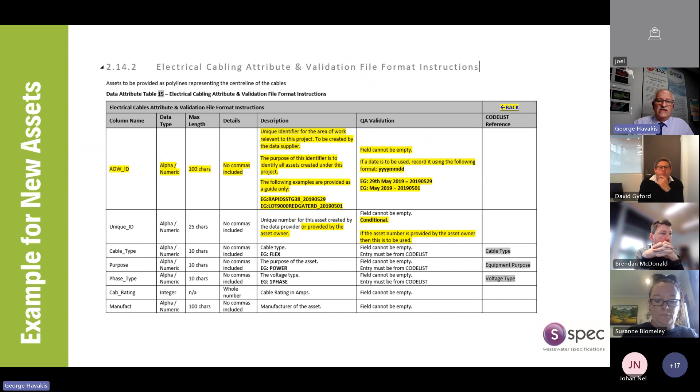When you look at the existing version, you'll find an additional column. The purpose for that is we've looked at what is practically possible to capture when you go out in the field. There are three categories we've classified each attribute under: is it a core requirement, is it an optional requirement, or is it a desired requirement, which is YR, meaning more research is required. It may be that the research identifies there's no further information, in which case that's the answer - no further information. If there are default fields, you use the default fields.

Both of these versions are available through your login, available online. If you have an A-SPEC website login, you just use that to access these documents. If you don't, please let us know - I'll show you how in the wrap-up session. Essentially, fill in the contact form on the A-SPEC website requesting access, and Melissa from our office will address that for you.

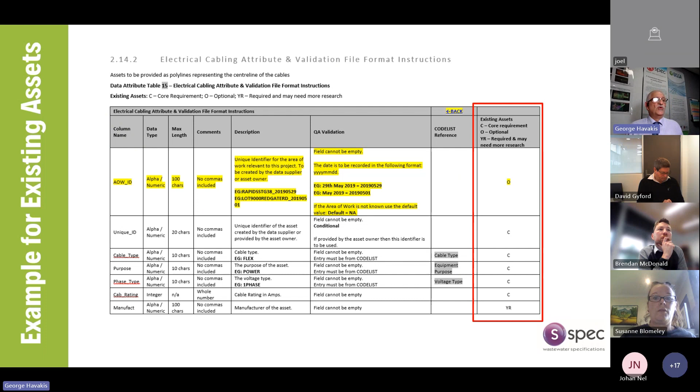To get to this point, there's a whole lot of other work we've been doing. Really what we're doing is future-proofing the specs, and a lot of that comes from looking at other initiatives, national and international, which I'll talk about today, and looking at input from the users. A few examples today come from authorities utilising the specs or consultants. Brendan, you might be familiar with a couple of examples I'm showing, because thanks to yourself at Wannon Water, it's given us some food for thought about how we deal with these assets.

There is sample data we're preparing to make sure people get a head start with setting up their environments. The sample data will come out as shapefiles, and in the shapefiles it'll have the new structure.

As I mentioned, 4th of September is the go-live date for all the new versions. So the impact is that any projects or new subdivision developments requesting permits on or after the 4th of September will require the data to come back in the new version, the 2023 version.

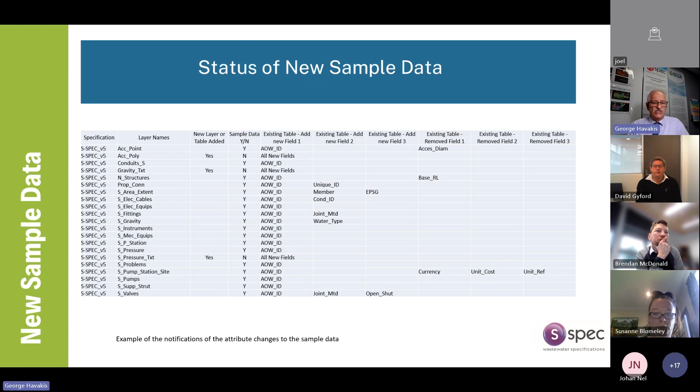There's a lot of work being done in this space with Australian Standard 5488. Some organisations use it to put a level of certainty about the quality of the data in their systems. There are 4 quality levels, which I'm happy to go into during the wrap-up session if people have a request for that, so put that in the chat. Both Gabby and I have been on the technical committees for Standards Australia reviewing AS5488 to make sure it makes sense from a spatial perspective.

From a visualization perspective, the image on screen is something you may be familiar with - when walking down the street you see markups on the ground. These are a requirement for any road opening in Australia. Locators need to locate the underground services, go through a dial-before-you-dig scenario, and mark it up on the ground. On the left is the guide to the markings. It's not intended for a GIS environment, it's intended for markups on the road, so people know that anything blue relates to water, yellow relates to gas, and so on. This gives the people doing the road opening an opportunity to make sure they don't break into existing infrastructure.

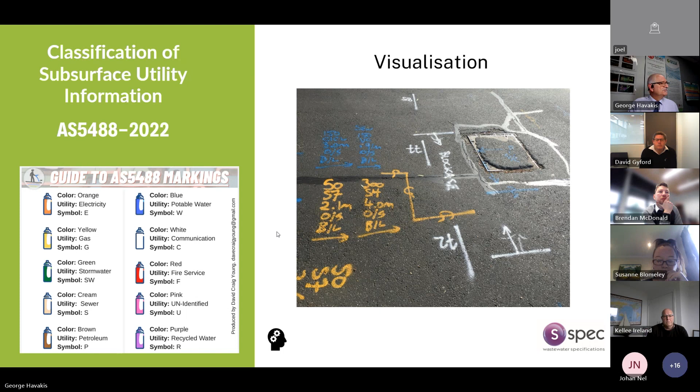From an A-Spec perspective, we've also matched it to see what the alignment is. From an asset class level, on the left, utility asset type, asset subtype and the description come from the standard itself. On the right-hand side we've identified which specification it relates to, what the asset class is, and any notes to take into account. We've done this at the asset class level, and also at the attribute level.

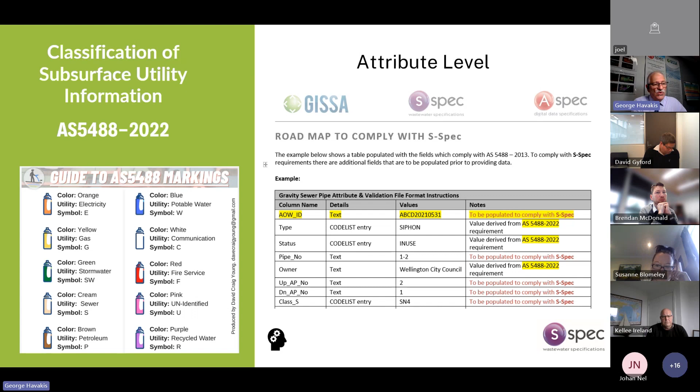The bottom line is we want to end up with this kind of data. What I'm showing on screen is a set of sample data we've been distributing for the 2019 version of S-Spec, and we need to transition from an AS5488 environment to this kind of environment. We want to be updating the asset data at every opportunity we get, irrespective of the kind of activity that happens out in the field.

Michael, can you please pop up the next poll to see if people have been asked to use AS5488?

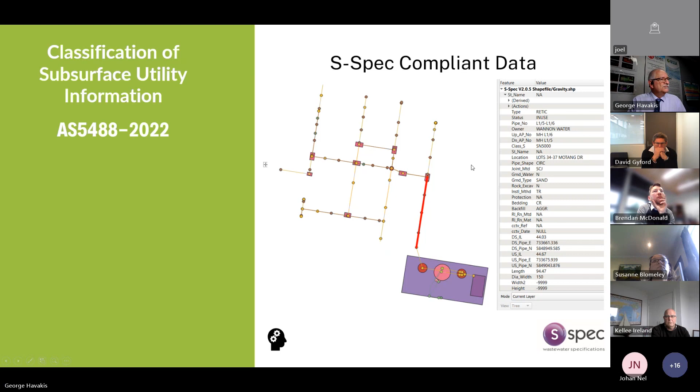There's another initiative that Water Services Association of Australia is undertaking, through an MOU with BIM for Water in the UK, for the management of asset data using UniClass. UniClass is quite topical at the moment because for Victoria, it's also part of the Victorian Digital Asset Strategy. This WICHS initiative addresses the water industry classification, hierarchy, and standardization group. This group is a task group which is part of BIM for Water, which forms part of the UK BIM Alliance.

There's quite a bit of work done around standardizing the hierarchy. We've had a look at it to see how A-SPEC fits into it, and it's a really good initiative because it provides guidance about standardizing your hierarchy. We've been doing quite a bit of work of late with addressing frameworks for creating asset hierarchies and then establishing hierarchies from those frameworks. What we've seen is that this particular initiative is not well used that I'm aware of. If you have a different experience, don't hesitate to put it into the chat or to contact us.

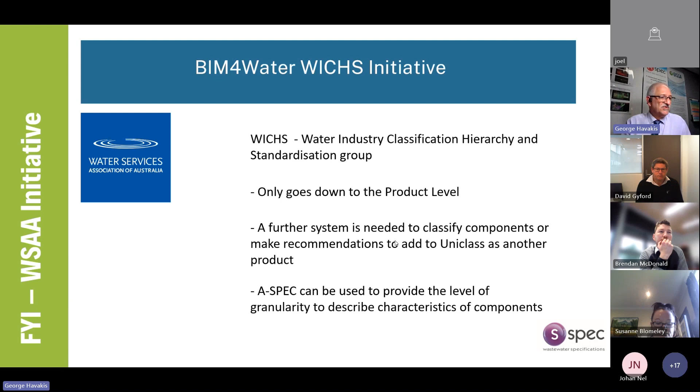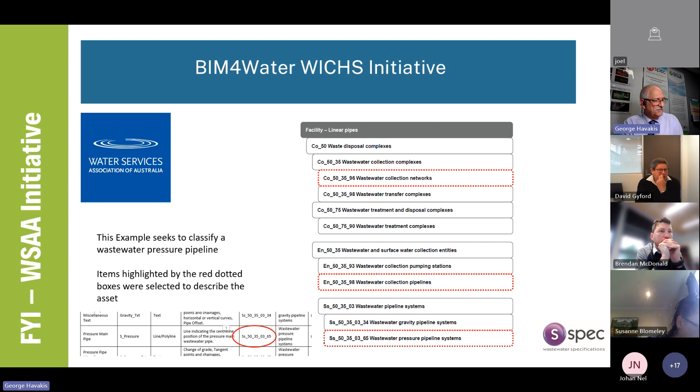It sometimes describes the material. So what we've done is we've looked at it from the A-SPEC perspective, and we've also looked at VBIS, which is another information system that's been developed specifically for Victoria, but looking to be more national. So on the left, we have A-SPEC, we then look at Uniclass, the coding in there, and then we've looked at the VBIS examples. You can see some of them, there's quite a bit of detail there where it refers to table 1, for example, in VBIS. Other times there's no VBIS code. So you can see that there's a level of granularity offered by A-SPEC which isn't offered at times by either of these systems.

The other thing is that VBIS does not have a geospatial component. So it's fine for a classification system, but there's no geospatial component. Uniclass is a little bit like that as well - it doesn't specify point, line, or polygon. It just specifies here's what we're capturing and here's how we code a pressure pipeline system, as I showed you on the previous table.

As you can see here, the codes come down to, for example, if we look at pipes and fittings - carbon steel, and there's some features under carbon steel, or copper, and there's some features under copper. So what we've identified is that these classification systems were essentially designed from an engineering perspective and targeted for the commercial software providers and the consultants to make sure that everything was classified and they would have the same kind of classification.

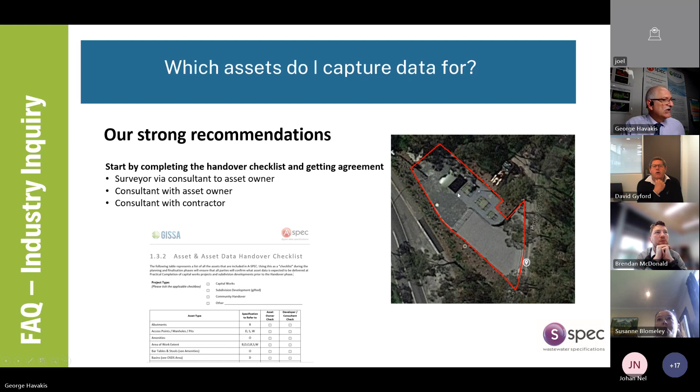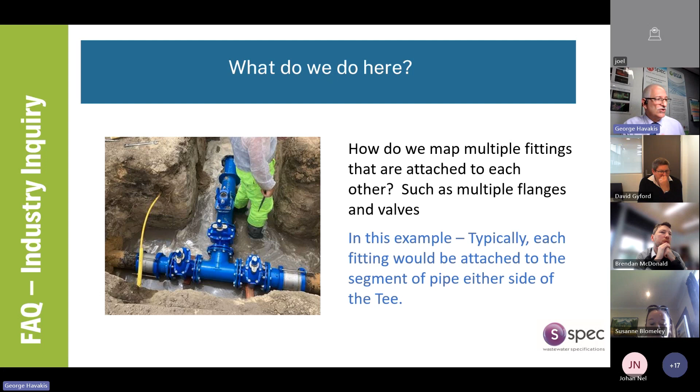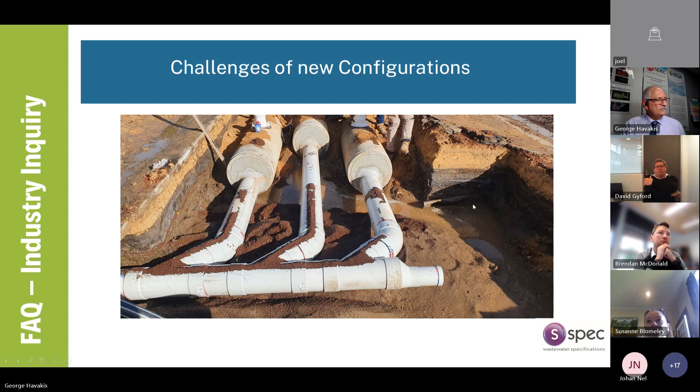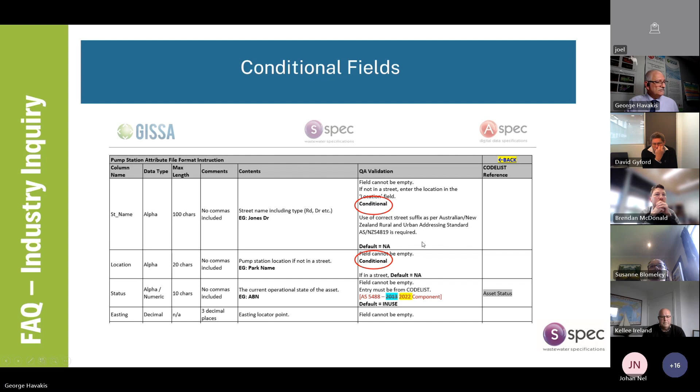I've shown this in the other specs, and this is so we're starting to create a data model to show the relationships. So we're going to be building an entity attribute relationship data model. What that means is that this one is table to table, but we're also going to be identifying how different attributes are linked between tables. Now, we're doing it for our own benefit to try to visually explain how the specifications are and what the relationships are.

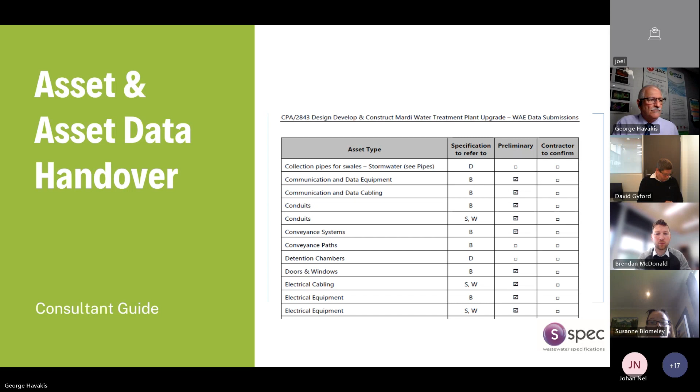The other aspect of quality assurance, and I haven't raised this before, but I thought it was important to outline this.

There is an A-SPEC overview document. In the A-SPEC overview document, we talk about a lot of things, and it's a companion document to all the specifications. One of the sections around acceptance testing is the amount of time for an organization to respond to a consultant. This was done deliberately so that the consultants knew that there was time being spent and deadlines applied to the submissions provided.

If you're not familiar with this, please become familiar with it. To date, the onus is on both parties to make sure that the data conforms to the A-SPEC requirements, but also that there is ample communication if the asset owner is not going to be able to meet these particular timelines.

So we have a catch-all phrase: the A-SPEC consortium members will carry out acceptance testing within the following guidelines, or from time to time as otherwise arranged with the consultant.

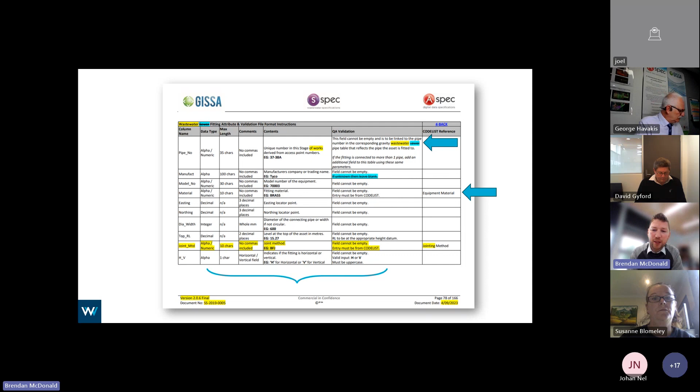Okay, so we've got standardized onboarding, that's the same across both authorities, which requires registration to the A-SPEC online webpage. You sign up once, get the access, sign your little waiver that it's IP and you agree to that one-time thing, and then you can use it for as many projects as you want. You then go on the mailing list and you're getting updates as things change, so access to the standards online means you remain current.

One-off registration to the ACDC portal then allows you to validate your submissions. We provide the induction to the ACDC portal.

That was a big push at the start of the project when it was implemented, but we do have new consultants coming along and not knowing what A-SPEC is or what the requirements are for the ACDC portal. So we're happy to provide any training to newcomers on this method.

As well as an induction to the ACDC portal, where to find the DWG drawing templates, what they mean, how the layers work, training, frequently asked questions, and tips and tricks with using CAD and those drawing templates. There's also the AutoCAD menu bars provided as well, just to help facilitate drafting a bit quicker.

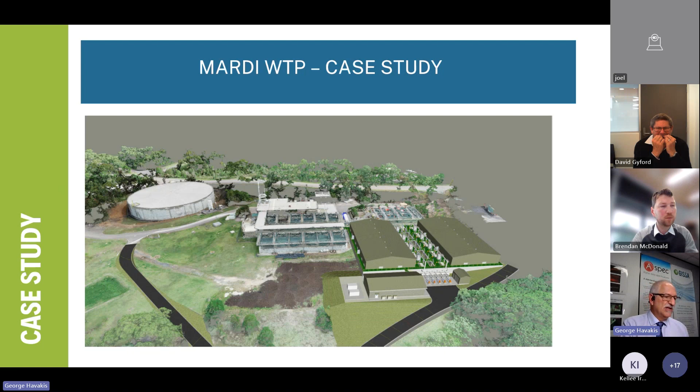It was really important because we'd been talking to them about S-Spec and W-Spec and the benefits of that. So they said, okay, we want to apply A-SPEC to this. How do we do it?

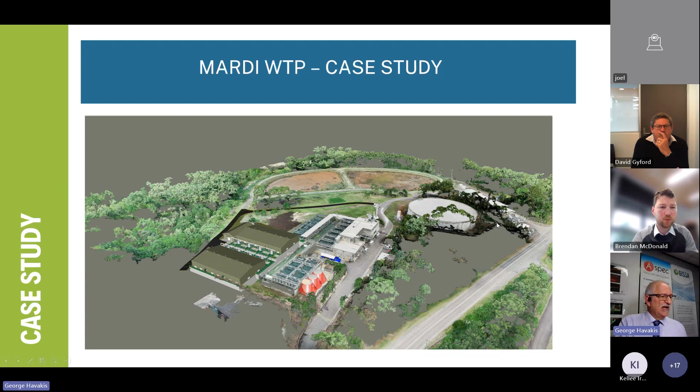So we started off by having a look at the drawings that were sent. These last two images that I've shown are really great because it shows some virtual reality imagery overlaid by the new design. I really appreciated having a look at that. And so we got into finding out what needed to be captured.

At the time we had a team of 4 interns working with us. I was taking them through how to apply the recording of assets to their discipline. 3 of the interns had completed masters in civil engineering, and the 4th had an undergrad in civil engineering and was completing a master's in business and communication. For them, it was really about extending their knowledge and skill base—they'd been taught all about designing and building stuff, but there'd been no conversation around recording and why things are recorded.

So we used this as an opportunity to provide them with some industry-specific training and exposure, as well as provide our client with this kind of work. Now, because we were using the interns, we didn't actually charge the client for this, so it was a bit of a benefit on both sides.

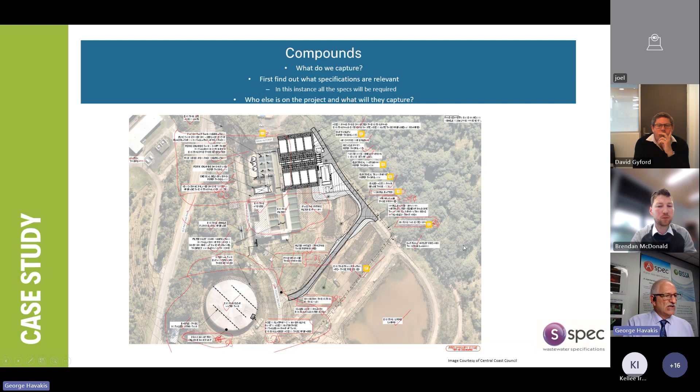So we went through the drawings. We looked at what was existing, what was being proposed, and on the screen I've got our markup of their drawings. The prep work is really critical—the more time you spend on prep, the greater the chance that what you're going to get is what you expect to get. I can't emphasize enough the amount of time you need to spend on prep. It is really, really important.

So the client sent through diagrams of what they were doing. In this case there was an existing tank, and they were going to refit part of it. You can see there are some baffles to be installed in the tank. We didn't have baffles—what's a baffle? So we had to do our own research.

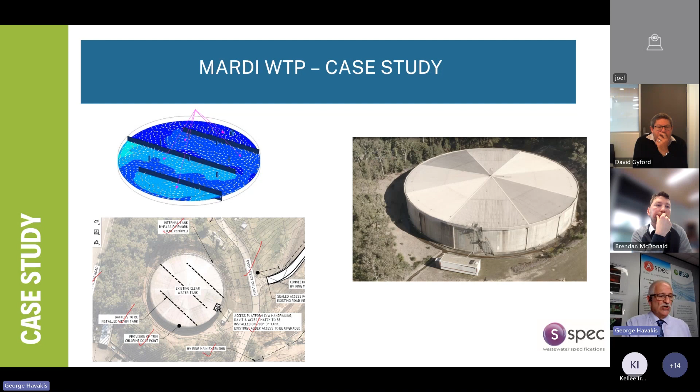We put the team onto researching the purpose of the baffles, and in conversations we'd have a regular meeting with the client, with the lead project manager for this project, and with our team, going through where things were at. They sent us through other diagrams about their sludge lagoon and riprap—I'd never heard the term riprap before. I always thought it was just rocks, but there's a particular phrase we all learnt. So we tied that back to the specs about how we could apply it.

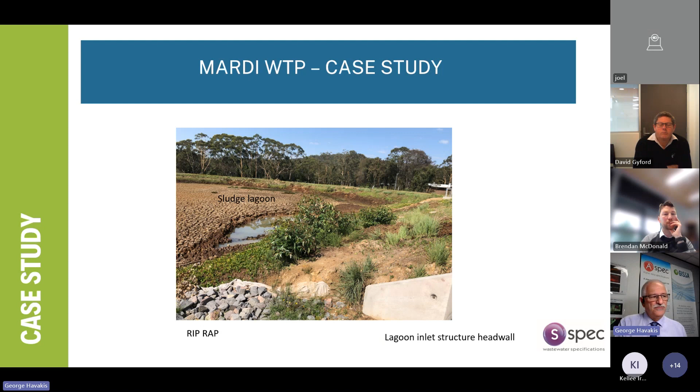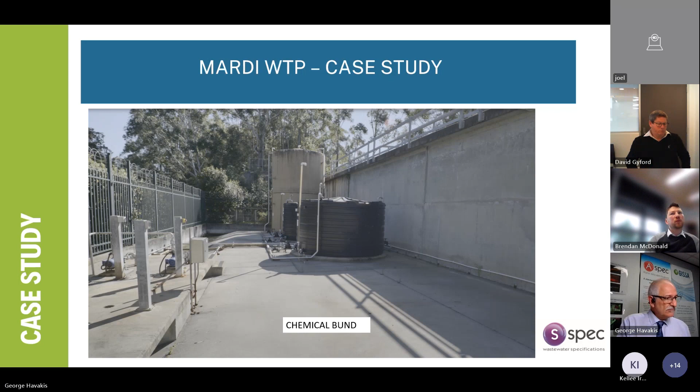Lagoon inlet structure head wall—yep, pretty common. Essentially the client was sending us through details about what was on site, what was expected to be on site, and asking us how it would be treated in A-SPEC. So they sent us through a spreadsheet, and we went through listing all of the asset types, the specific asset description, and whether it was new or upgraded.

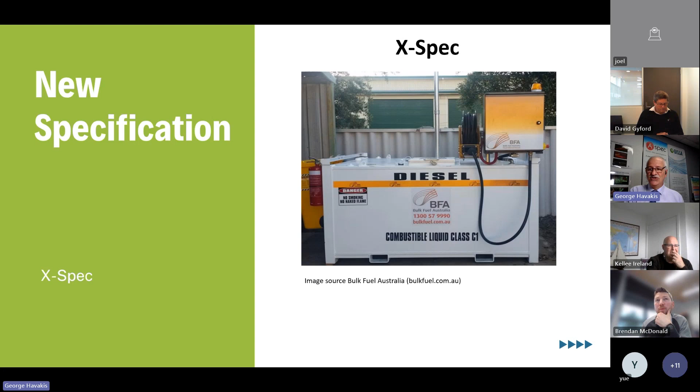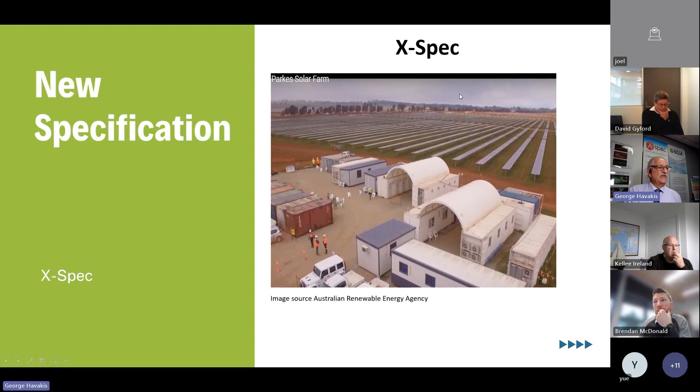Solar farms, we're also looking at that. We don't have an E-Spec at the moment for energy, but some of our asset owners have solar farms, so we're also considering that.

We're creating a list of dedicated A-SPEC contacts. This will only be available through a login, and this will go onto the website. The intention is that there is a dedicated email address for the group dealing with the A-SPEC data.

So if you're looking to inquire directly with the council, rather than go into an info@council email address, this will go directly into the area dealing with the A-SPEC data. We will be updating that over time.

The next forum is W-SPEC next week. We've not yet confirmed our community presentation, but watch this space. And the second part will be of the Mardi water treatment plant project, which I've spoken about.